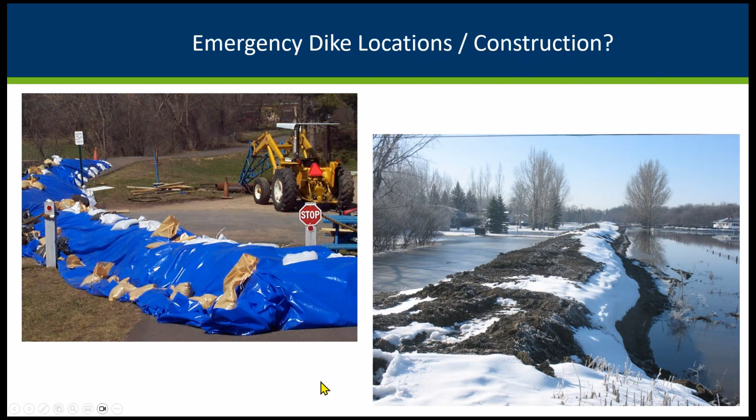But a reminder that when you're looking at where you're going to put those temporary dikes, look at your floodplain map. Remember that your floodway is the area that you're supposed to keep open for the water to go. That's the area where during flooding you expect higher velocities and deeper depths. We do not want to be blocking that. So don't put your levees or sandbags blocking parts of the floodway. We have seen some communities do that in the past.

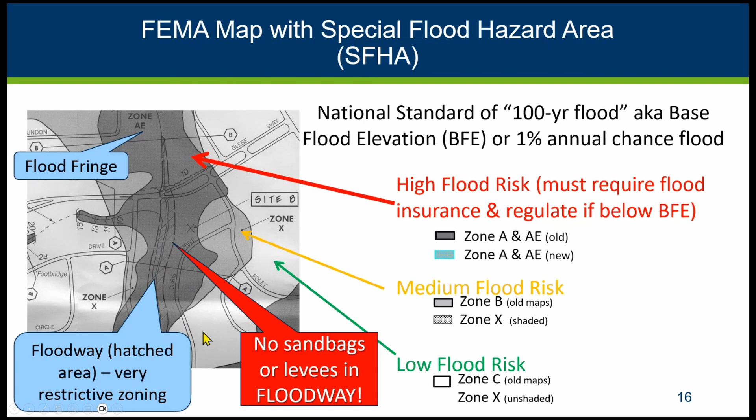So when you're planning where you need the temporary levees or dikes, don't put them in your floodway, because that's going to cause problems. It's going to increase flooding in other parts of town, because you need that area for the flowing water during the floods. Same thing on the newer maps here. Don't put your sandbags or levees in the floodway.

The other thing is to think about where you're placing those temporary berms. Do you have right of entry? Do you have the easements that you need? Are there buildings that have popped up that maybe aren't legal because they're in those easement areas where your levees are supposed to go? Looking at those things ahead of time can be a big help.

The next thing to think about is what critical facilities do you have in your community? Where are the priorities for evacuations? Do you have nursing homes or schools or prisons or hospitals with vulnerable people, where if they're at higher risk, you're looking at where do you move them?

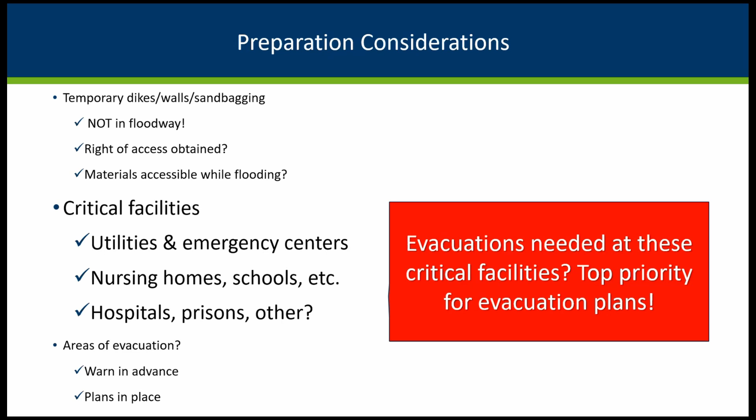Here's an example in Cedar Rapids, which had flooding in 2008. They had facilities on an island in the middle of the river, including their city hall, county courthouse, and county jail. Getting folks out of those areas and having important government facilities flooded was a huge problem for them in 2008.

And it's one where people are basically living there much of the year. So we worked with this community and they were getting elevations at all those spots and identifying areas for them to move to and figuring out what their evacuation plan was going to be. And in general, for campgrounds, we want communities to have their plans. And the flashier the floods are in your area, the more important it is to have a good plan in place.

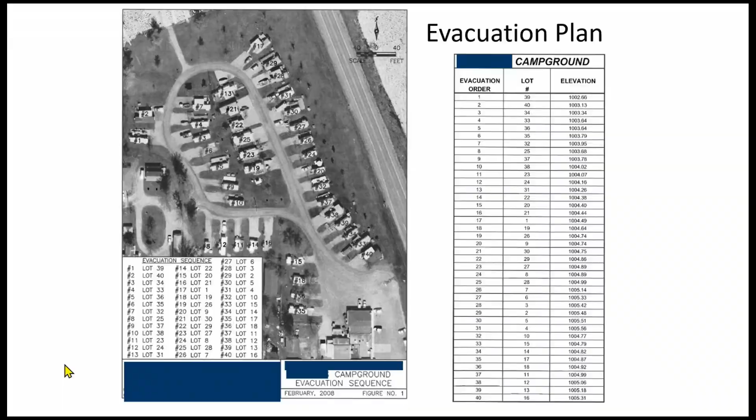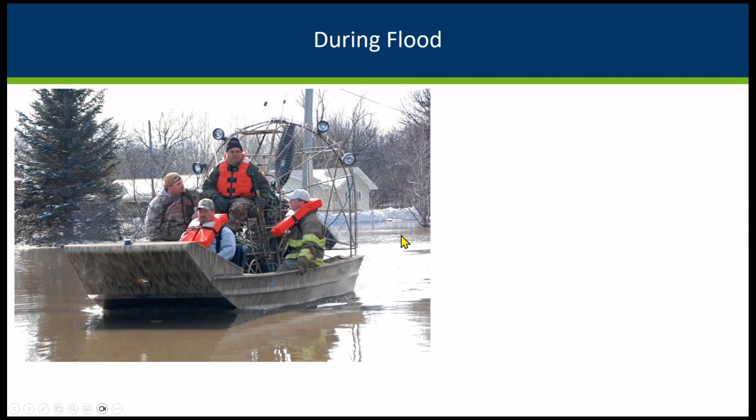Obviously, you want your first responders out there helping people that are most at risk. We've got a few pictures of the folks being rescued. And of course, with the spring flooding, part of the issue that makes it more difficult is it's the spring thaw. We've got snow and ice blocking things. Looking at what parts of the community are flooded. And they're trying to make sure everybody's okay and everybody who's at risk is out of there.

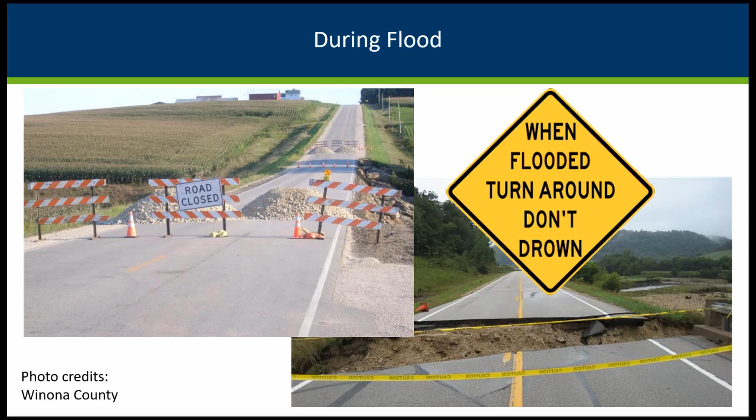But then there's also a reminder of some of the information to get out there, the reminder of turn around, don't drown. And that's something that the National Weather Service has some great resources on, that campaign. So again, turn around, don't drown. If there's some water over the road, don't drive across there.

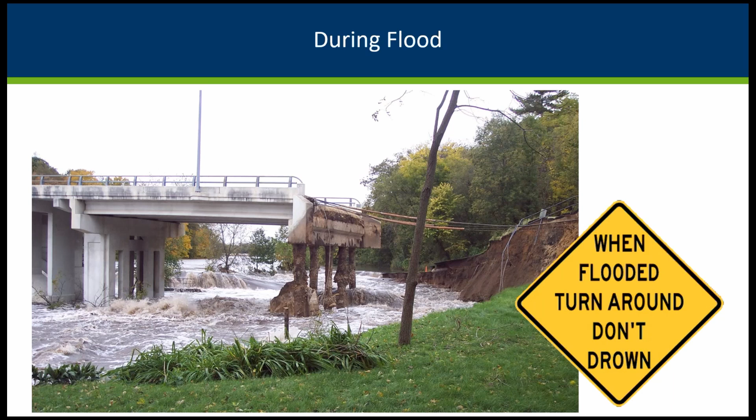Here's an example of what might be under that road. And people don't realize that it could be a huge gap like this, or it could be that smaller erosion that I was showing in the earlier slide. But either way, you don't want people driving across those areas. In Minnesota, and I believe nationally, most of the deaths do occur during flooding due to people trying to cross places that they shouldn't be crossing.

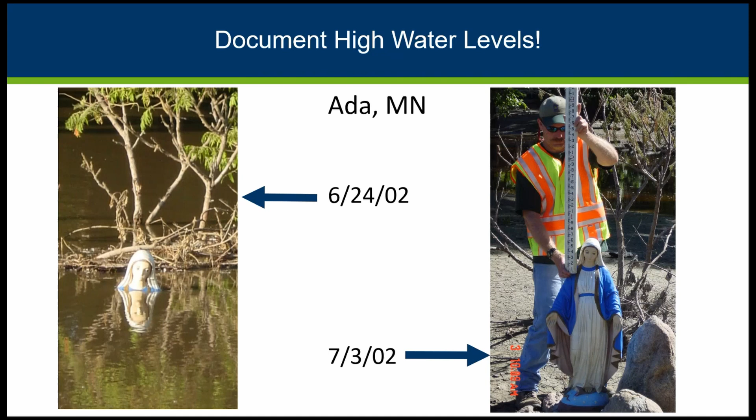So also documenting high water levels. Okay, this one was put together to be kind of humorous. And I was told that the statue is actually kind of floating, so this is probably not a legitimate watermark, but it still kind of gets across the story. But here we've got an example where you could see the watermark. They're getting that while they can and putting in different stakes, showing those high water records while you can still see them before the evidence goes away.

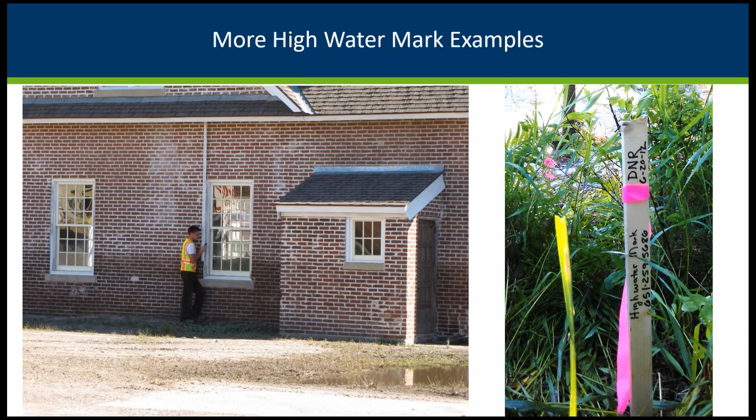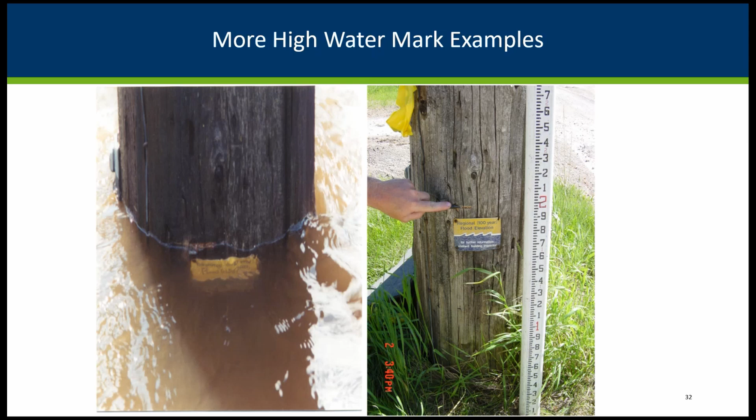And there's a lot of good reasons for knowing how high things got for the given storm for future planning. One more example where they were showing the 100-year. So here you can see it got a little bit above the 100-year. And so they're getting what that actual elevation was. But definitely something communities, once the rescues are done, once it's safe to get out there and be looking at the evidence, you do want to get that at least marked, and then maybe you'll come back later with surveyors, but now we're able to do a lot more surveying out in the field with the GPS and getting better information fairly quickly.

A little thing reminding you that you want to keep track of the staff and volunteer time and how much they're spending, what they're doing in responding to the floods. Because if there is a state or presidential disaster declaration, a lot of that effort can be reimbursed, but you'll need records to show that for getting reimbursement.

And some of the post-flood communications, certainly now, in addition to radio and newspapers and things on your website, we've got a lot more of the social media. And in more recent flooding, that's really where a lot of people are getting their information, is on the social media. Oh, and I got to change that to, it's not Twitter anymore, is it?

During the flood, you're going to be focused on safety messages. A lot of communities and counties do a good job of getting maps up there or notes about, hey, this road's closed here, that road's closed there, or getting some maps up. And even the DOT's 511 site, they've now got little water icons that show areas that are impacted by flooding on the major roads, that they show the status on their website.

After the flood, folks are going to be clamoring for guidance on what to do with their debris. And you'll need to be talking with citizens and getting information out on where to call in and schedule inspections, and reminding them of the need for permits, and a reminder that in floodplain areas they should be getting permits for repairs also. That's something that FEMA made sure is in our model floodplain ordinance.

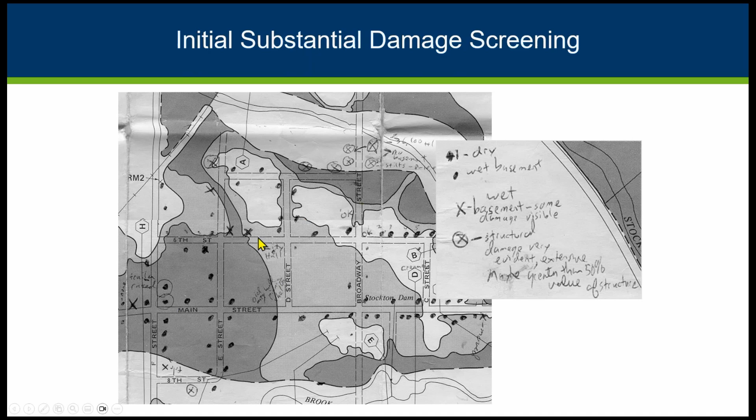But one of the first things you're doing as the water goes down is trying to figure out where you've got buildings that might be damaged or substantially damaged. And sometimes, if you're in a small community, this is an example of a map that was done with the community official and their area hydrologist.

Of course, nowadays, much more can be done with your GIS systems. And this was probably from 2010, so it's getting old here. Now you've got even better systems. But this was showing nicely where they were seeing damage, in this example in Blooming Prairie there. And this was work that Steele County did a really nice job in figuring out where their damage was and where they needed to focus on inspections for potential substantial damage.

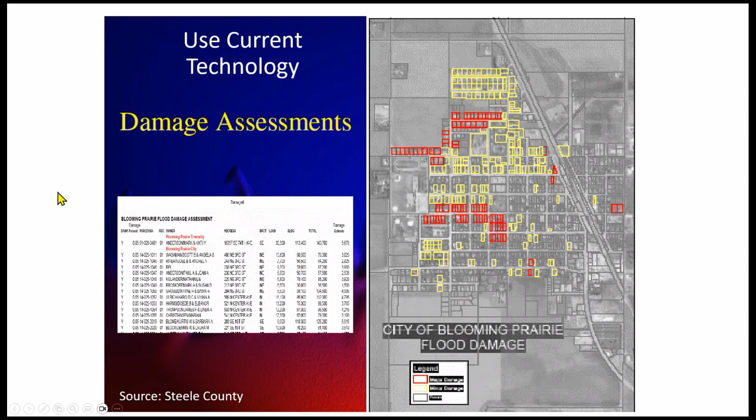In our playbook, our guidebook for response, we get into one of the first things you're looking at, which is whether the buildings with potential damage are in areas regulated by your ordinance. So first you'll be looking at, is it within your community? And then the area where you had the flooding, where are those buildings located? What buildings were in that area? And of those buildings within your community, which ones were in the special flood hazard area that are mapped?

So in this example, there were quite a few that were impacted, but some weren't in your jurisdiction, and this one wasn't in the FEMA mapped area. We might encourage them to build safer and smarter afterwards, but it's this building here, number 4, that's in your jurisdiction, that's in that mapped area, where your ordinance applies, and you need to verify if they're substantially damaged or not.

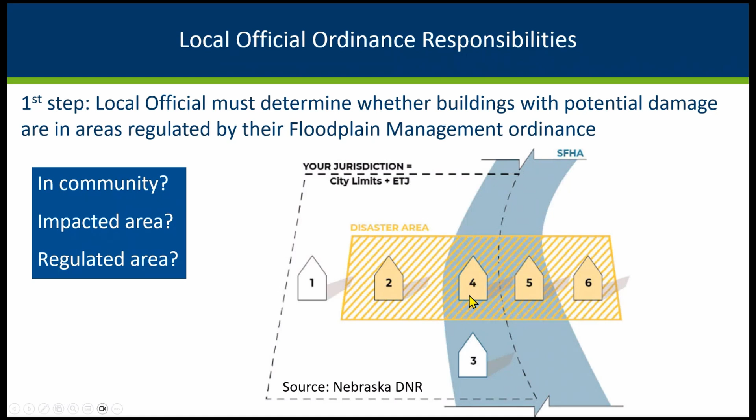We do have this little flow chart that gets into some of the same kinds of things. It's 10 years old now, so it's probably overdue for a bit of a refresh along with some of our other brochures. Hopefully helpful, just kind of broad level, what do you need to be looking at?

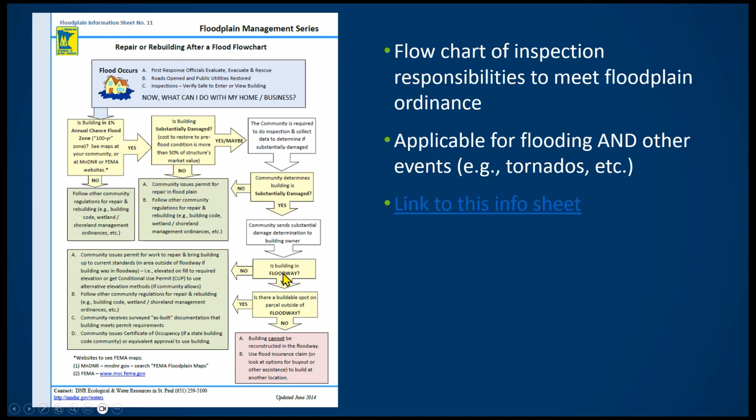Is it in your community? Is it potentially substantially damaged? If it is, what's allowed? And can they rebuild where they are? If they're in a floodway, then they can't. Some high-level guidance for that.

I've already mentioned substantial damage a couple of times. I need to talk about what substantial damage is. And that is in your ordinance. This is coming from federal requirements. These are substantial damage definitions and the requirements related to substantial damage.

But what it really applies to is the older buildings in your community that were built before you had maps, before you had your current ordinances. And those existing nonconformities are allowed to continue to exist. They can do maintenance and repairs. They were not required to immediately come into compliance with your new regulations. But once they've been substantially damaged, they do need to be brought into compliance.

And determining substantial damage, it's going to be based on damage of any origin, so it's not just flooding. In Minnesota, we see a lot of tornadoes. We do see a lot of fires that become issues. The tornadoes are usually getting a bigger swath of your community. Fires tend to be more isolated, and flooding tends to be broader.

And what you're looking at is, what does it cost to repair and bring it back to the pre-damage condition? And you're looking at the cost of doing that restoration, whether they do the actual repairs or not. Sometimes people will say, well, I'm just going to do part of the repair to make it livable in this part of the house, so I'm not over 50% because I'm not doing all that work.

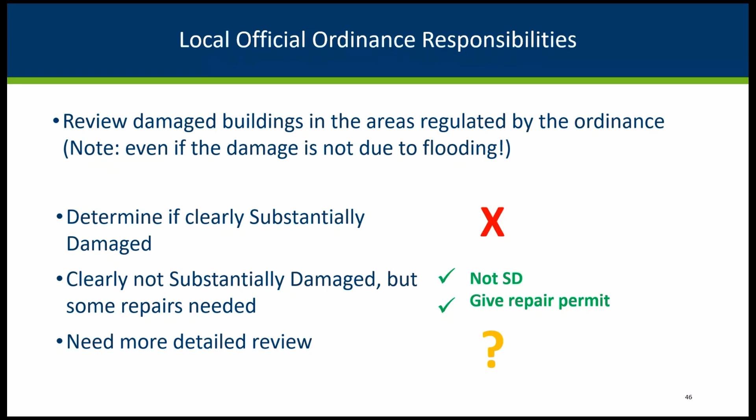There will also be some that you can see that, yeah, they're going to need some repairs, but it's clear they're not substantially damaged. So you'll make that determination they're not substantially damaged. You'll give them a repair permit. And there will be those that it's hard to say. You're going to have to go into more detail to figure out if they're substantially damaged or not. So you'll want to be inspecting all the impacted areas again that are within your floodplain.

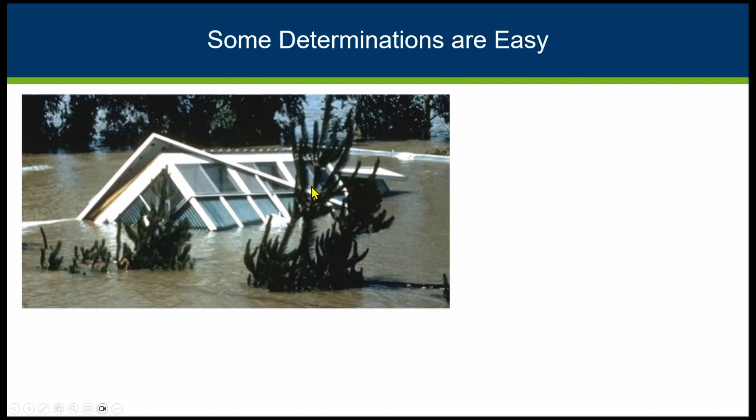And you may not know about some of them at first, but those of you with experience will know that when you start seeing all the debris out there piling up on the curbside, pretty good sign that you've got damage in that building. And as I said, some of the determinations are going to be easy. This is from a FEMA document here showing this building clearly substantially damaged. FEMA does have this bulletin here. It's a few years old now, from 2018, with some nice summary about substantially improved, substantially damaged buildings.

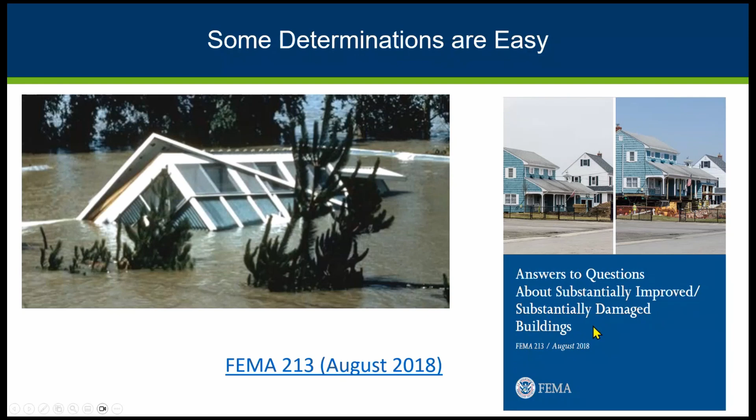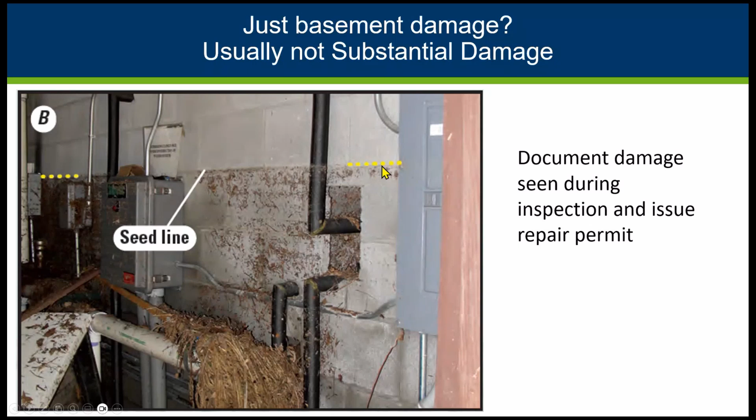And as you're doing those inspections, you want to make sure that you're getting those records, you're taking pictures, making the measurements of how high is this off the floor. Well, this one looks like they've got some possible utility damage too. Typically, if the damage is just in the basement, it's not substantially damaged, but they might have some repairs to do. And you might encourage them to elevate some of those utilities.

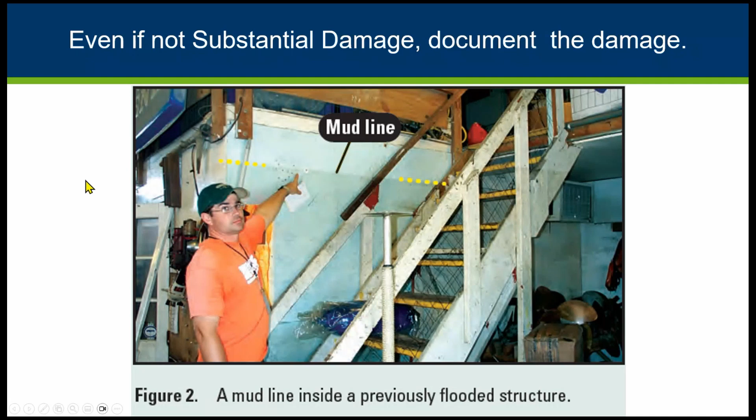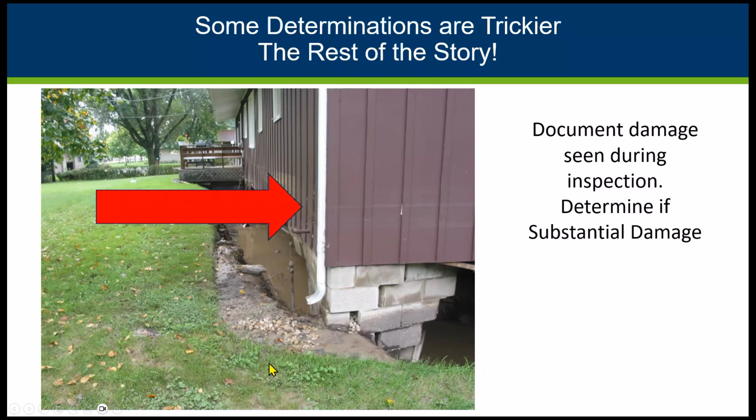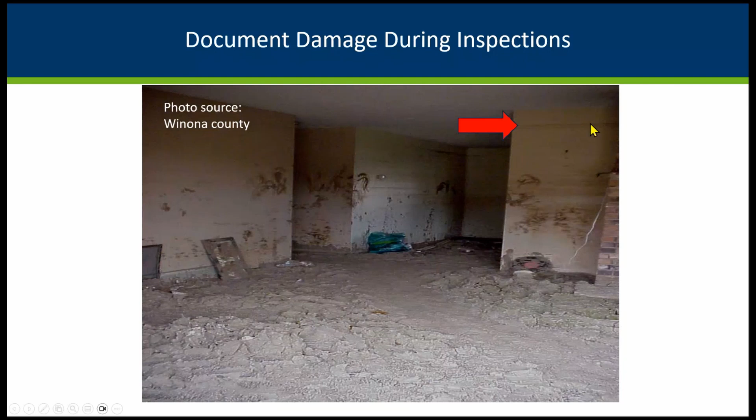Again, Winona had some great photos of the damage that they saw in the 2007 and 2008 era. A mess there, but they were getting the documentation of where the damage was. In our playbook, we do have some depth grids or depth charts here, giving an idea of how much damage you have on different kinds of buildings. Understandably, if you've got a one-story building and the flooding gets up on that main floor, you're more likely to have significant damage than if the flooding is just in the basement, or if it's a masonry building, like that shed that we were showing. It's masonry or it's all metal.

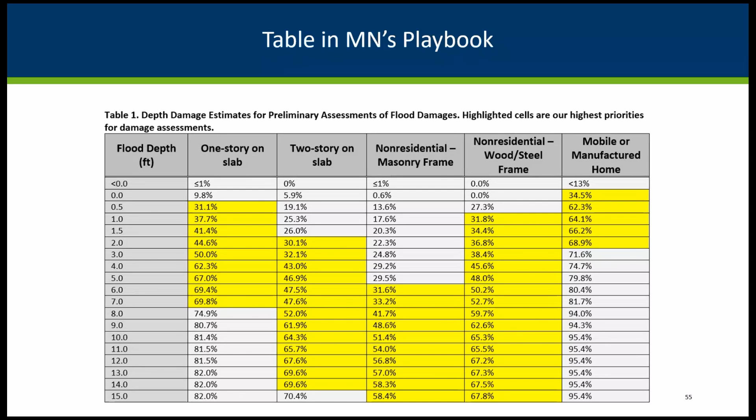You're less likely to have the damage. Mobile homes, basically, if the flooding touches them, they're going to be substantially damaged. Pretty much everyone that I've talked to involved in flood response, every one of them talks about mobile homes, manufactured homes. You get water even on the underside of them, it wicks up and you've got substantial damage.

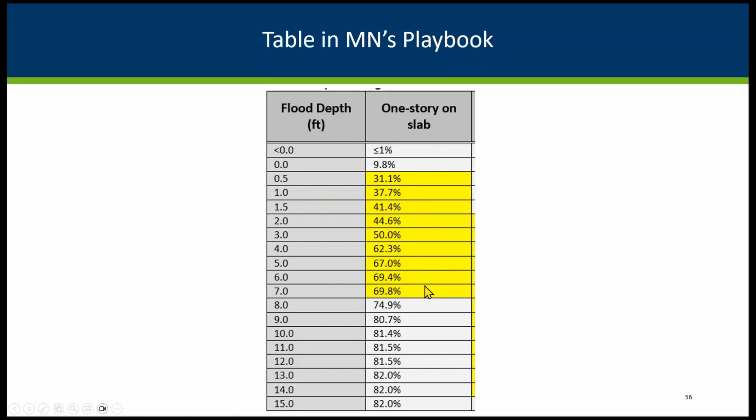And zooming in on one of the examples here, this one-story slab floor building, it doesn't take much water on that building before you're typically getting into that 50% range. So we use this as a guide to help you triage which buildings you need to be looking at more closely. And when they are possibly substantially damaged, you'll want to do a more detailed review.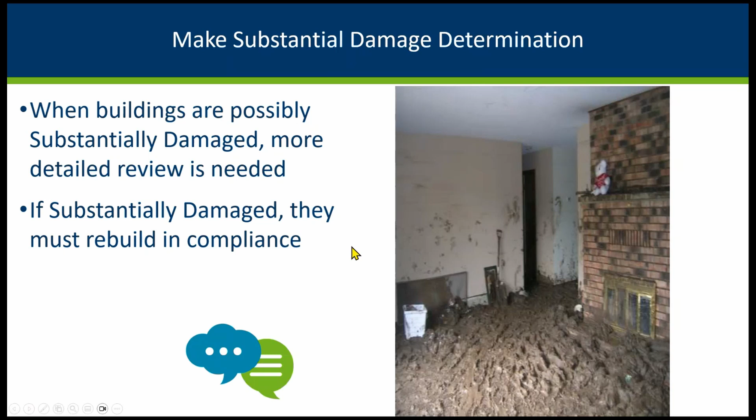It looks like I repeated this slide. Sorry about that. I guess that's why I was just pointing out this was substantial damage we were talking about, but for substantial improvement, we also look at that when people are repairing from floods, sometimes they decide they're going to do other improvements at the same time. And substantial improvement is looking at reconstruction, rehabilitation, additions, or other improvements. We're looking at, is that more than 50% of the structure market value, again, before the start of construction?

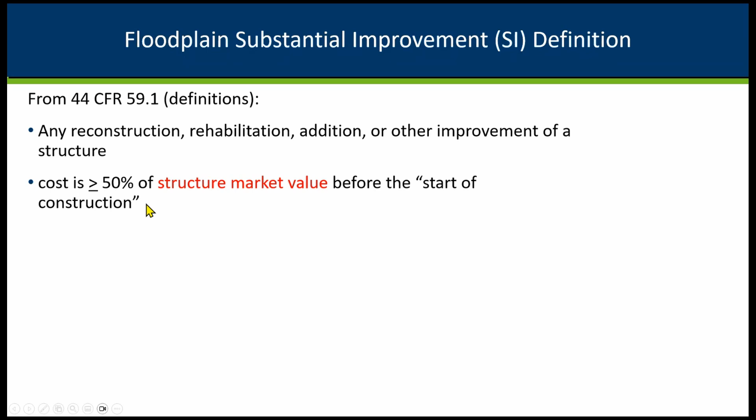And there is wording in the definition of substantial improvement in the regulations that says it's that cost of what you're doing for improvements and repairs and maintenance within basically a year period, the way we've got it written in our sample ordinance. It does specifically say you don't include the cost of repairing previously identified health and safety violations. If some official has red tagged their electric system or their furnace or whatever, you don't include the cost to make that repair. When they start doing their improvements, they can't say, oh, well, this should have been red tagged, and so we're not going to include those costs. It has to have actually been red tagged by a local official in advance of them doing the project.

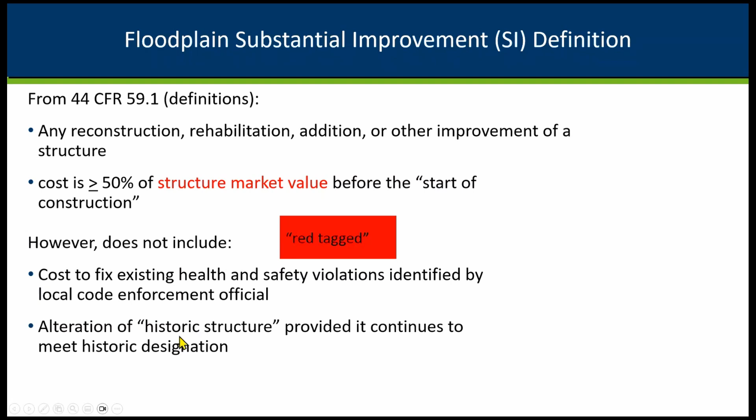The other exception is when you're altering a historic structure, that as long as it's going to continue to meet that historic designation, then a lot of the costs don't get included, and they're not considered substantial. They don't have to meet some of those substantial improvement requirements. And FEMA does have a document that gets into more detail. If you have a historic building, we can help you look through what resources are available, or get some input on how to interpret what things do or don't need to be included in making your determination.

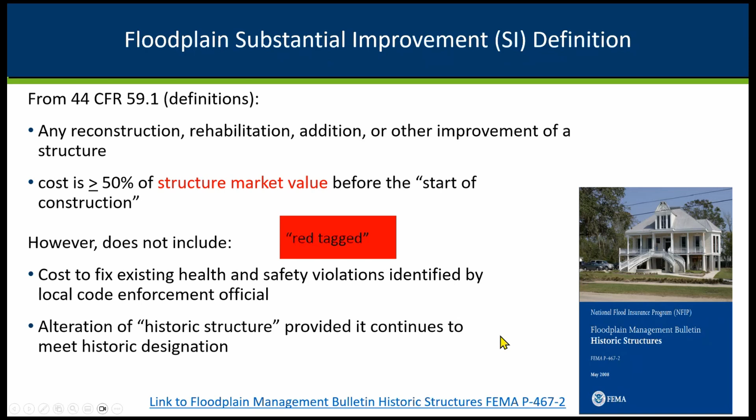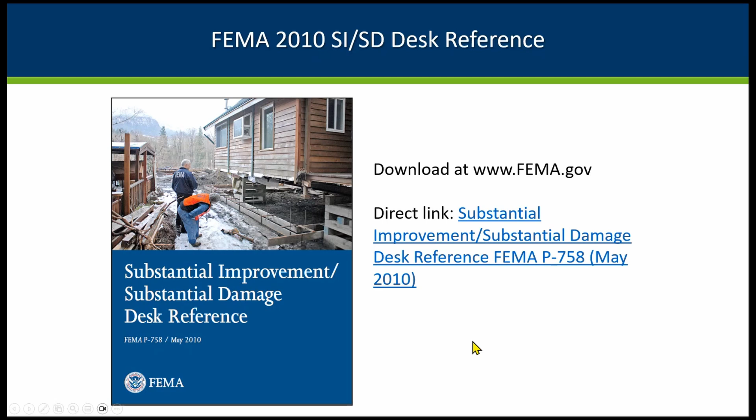The main reference that FEMA has is their desk reference. This is probably a good half-inch thick document. It is available electronically. This is getting older now. I don't know if they're working on an update or not, but it does have a lot of good information in there. And it's got some flow charts to help you figure out what part of the desk reference to look at. And it's got some good information on estimating market value and estimating costs.

And it points out that you've got to be looking at the market value for the structure. Reminder that the regulations say it's the structure only. You're not looking at the land or other accessory structures. You're looking at just that affected structure when you're looking at whether it's 50% or more of that structure. And for many of our properties, the land is really the valuable part, and they might have a small, less expensive structure there. And so they're more likely to be getting into that substantial damage, substantial improvement situation.

We recommend, for sure, you want a consistent method. And the most common way that communities are looking at that is the assessed value for taxes. And the nice thing is that in your assessed values for taxes, they do separate the land value from the building value. So you've got that to work with. And so work with your county assessor.

In some counties, you might know that you need to adjust it by a multiplier. In the state of Minnesota, you're supposed to have your assessed value be fairly close to the actual market value. So they're usually pretty close, but there might be some adjustments that counties know they need to make in your county. Other states, I've heard about how the assessed values are way off from the market value, and they definitely have to make some adjustments.

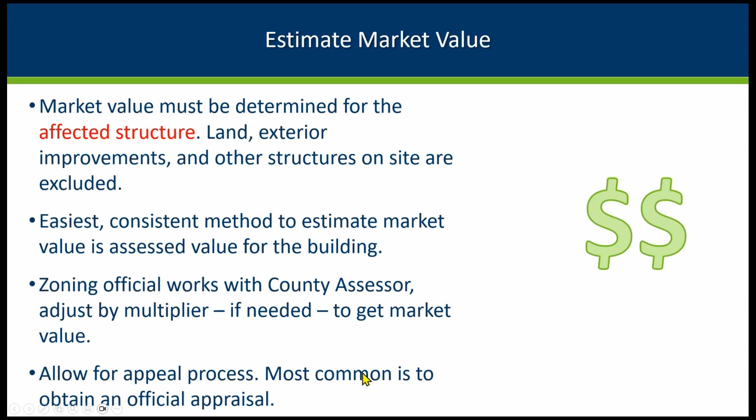The other important thing is that you have an appeal process. The most typical way folks will appeal that is to have an official appraisal done. And that updated, more exact appraisal can be used for determining that market value, for determining whether it's substantially damaged or not. And then if it does show that that building is much more valuable, then you're going to be sharing it with your assessor's office.

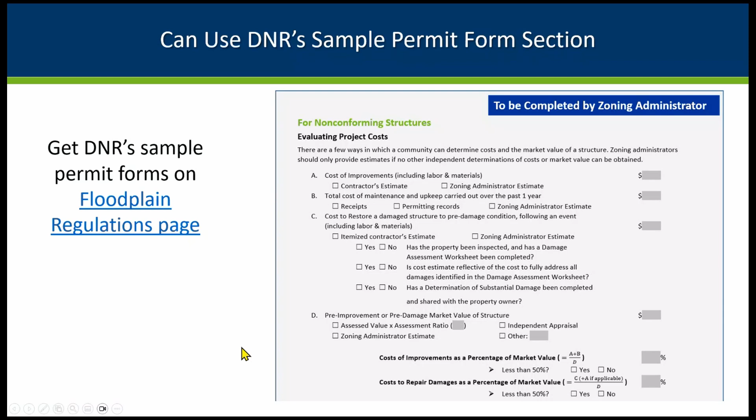In the latest DNR sample permit forms, that includes information for buildings, we do have some triggers and reminders of what to look at for evaluating the project costs for non-conforming structures. So if it's useful for you, use it, great. Otherwise, you might find other example forms more useful. Back to the FEMA guidance, in that desk reference, they do have a page where they get into more detail on what has to be included in those cost determinations.

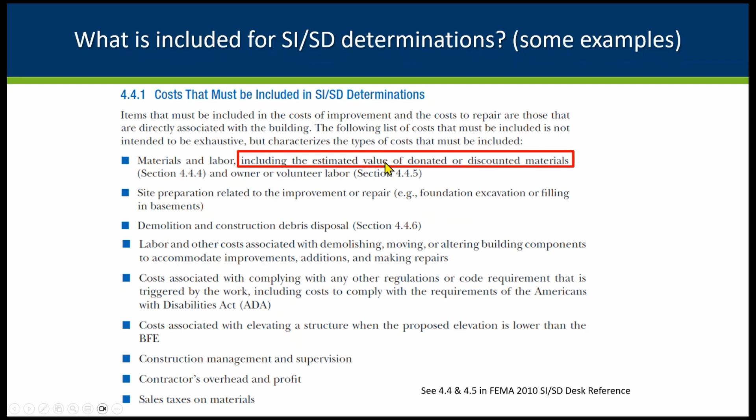You do have to include the value of donated or discounted materials. They can't say, oh, well, the guys at the church just dropped off this stuff and donated it, so it didn't cost me anything. Well, no, you have to look at what it would have cost if you had purchased that material in your community. The other thing is the labor costs of the owner or other volunteer labor.

You should be looking at a contractor's bid of what it would cost to do that project. In fact, here the contractor's overhead and profit should be included in there. So the best thing to be doing is requiring that they're showing some contractors' bids by contractors familiar with what the costs are in that area. Because it does vary by regions of the state, certainly by regions of the country, what it costs to do different kinds of projects.

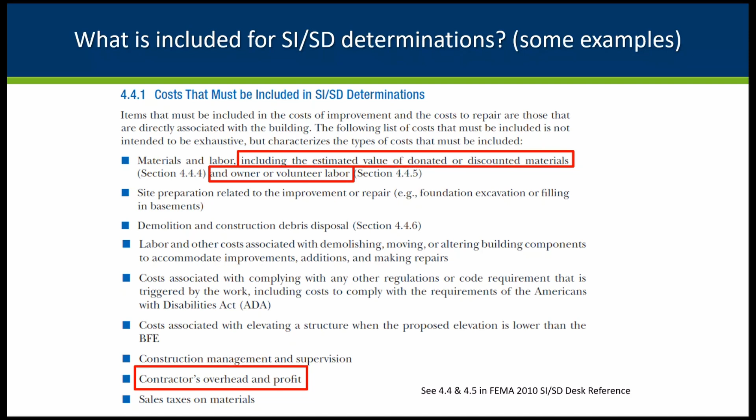Things that you don't have to include would be things like the cleanup, trash removal, permit fees, inspection fees, surveys, outside improvements that aren't part of the building, some of these kinds of things. It gives some nice examples of the things that you don't have to include when you're making that determination.

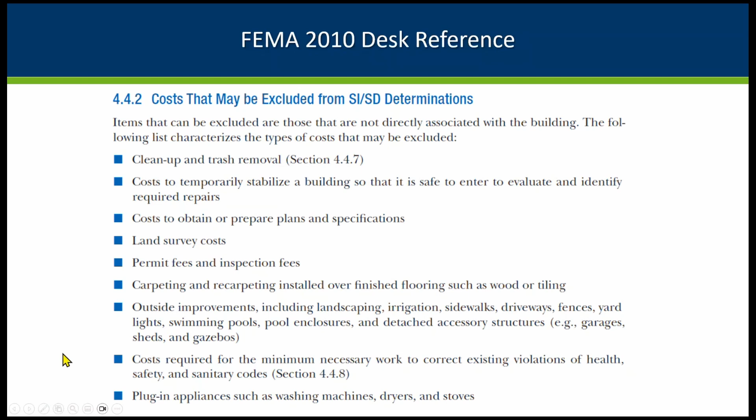And we do have this sample determination letter that you can use in our playbook here. You put it on your city letterhead, a formal letter. You're going to want to have a documentation trail as you're working with folks. They won't be happy about being told that they've got substantially damaged buildings and they need to bring things into compliance.

Oh, and one of the things we note here is that letter, in addition to talking about that they need to bring their building into compliance, if they're, again, within that FEMA mapped area and subject to your ordinance, remind them that if they do have flood insurance, there is the increased cost of compliance. It's basically a rider on their insurance policy if they have the NFIP flood insurance policy. If they're substantially damaged, they can get up to $30,000 to help with that extra cost of elevating, floodproofing, or whatever they might be doing.

A little bit more information on this in these next couple slides: if they do have that flood insurance policy and their damage is flooding, because it's the flood insurance policy, right now ICC pays up to $30,000. That's something that's been discussed at the national level, that they should really be increasing that amount. But at least currently, it's up to $30,000, and can be used for the cost to bring that building into compliance.

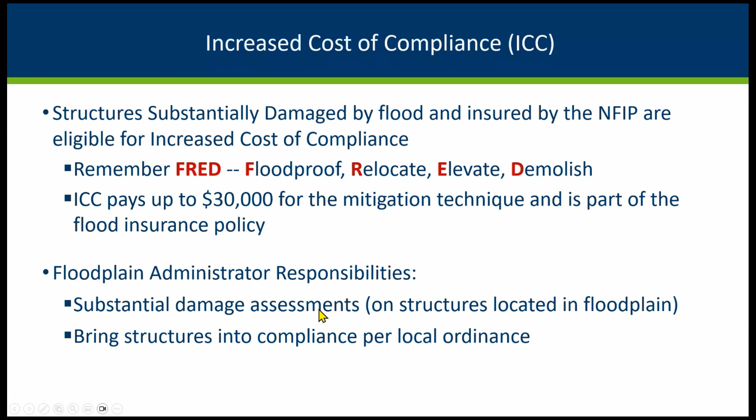But they do need the letter from the community to start that process. So here's an example of a house. This is actually provided by a fellow that we worked with in Rock County, one of the counties in Wisconsin. He's the ICC guru for local officials, a guy named Ray. Ray provided this picture of the building that was flooded and then showing the building being elevated.

And I can see that they're using the internal floodproofing technique that's allowed for residential structures. In Minnesota, it requires a conditional use permit for residential structures. In this example, they did the full level elevation, and I'm sure they're using part of that building as parking. When it's that internally flood-proofed technique, they've got their flood vents, it's flood-resistant materials. They can only use it for parking and storage. It's not a habitable area. But anyway, this is an example of one that I know got ICC money to do this elevation.

So the other thing is, what does trigger the substantial damage and being eligible for ICC, or what are some higher standards? The federal minimum is the 50% damage, that if it's over 50% damage, you've got to require them to rebuild. And that's also when they're eligible to get the ICC. In our state model ordinance, we have had cumulative substantial improvement language in our model for decades, trying to encourage over time getting improvements done and not having people spend a lot of money making improvements and then having it still be at risk for the main part of the building.

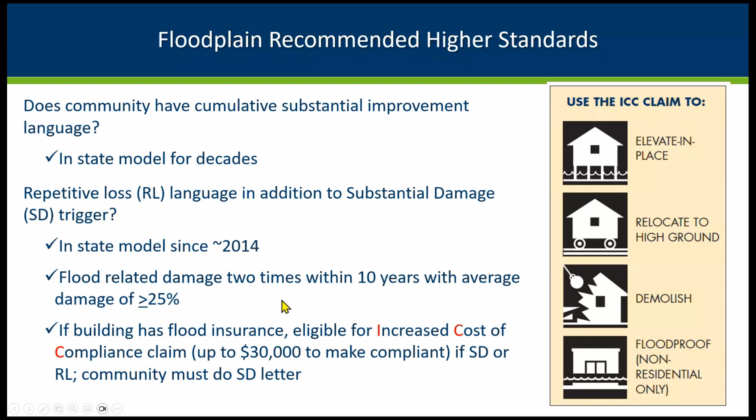And I know we've had a couple counties that actually just added that language recently because they had flooding on the Mississippi. Someone was damaged, like 30%. They weren't able to collect their ICC money, which they had hoped they'd be able to do, because the community didn't have that language in their ordinance. Now they've got it there, so if there is damage in the future, that person would be eligible for that assistance.

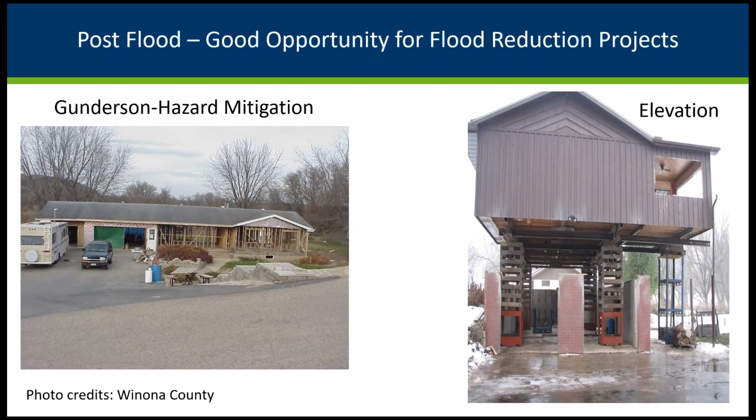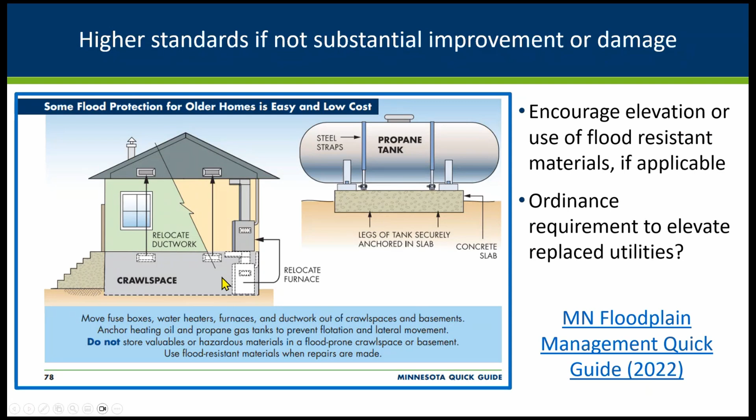So just ending with a few examples of improvements that are useful to make for the future. Here they use some of the money available from different flood reduction projects, encouraging relocating utilities. If it's not a substantial improvement, it's not mandatory, but you can make it a requirement in your ordinance that if utilities are damaged, they relocate them higher. And that's something we certainly would encourage. Oh, I see I'm down to just a couple minutes here.

So a reminder that we do have the DNR's general permit for making repairs post-flood, but sometimes in-kind replacement's not the best alternative. With the public assistance program, there is something where we can get some assistance for better projects that mitigate things better. And that's something we'll talk about more in the presentation we're giving on April 8th on post-flood and the resources available, the public assistance, individual assistance project.

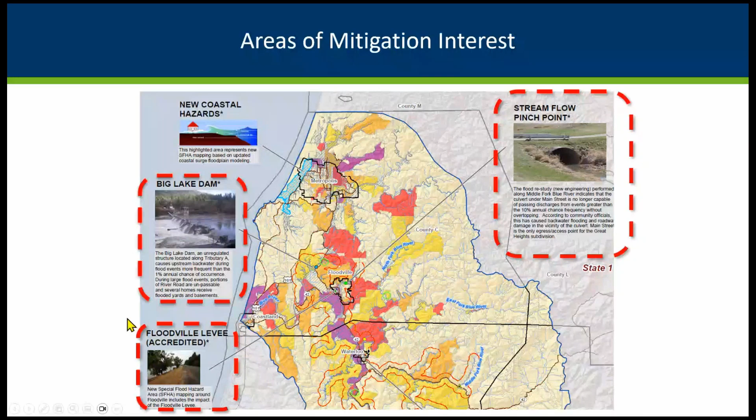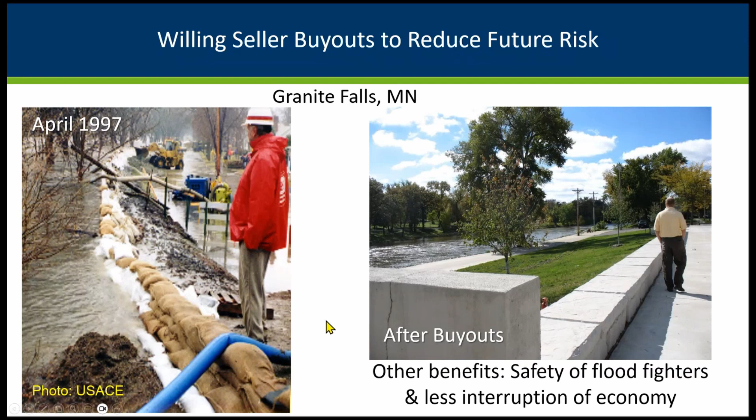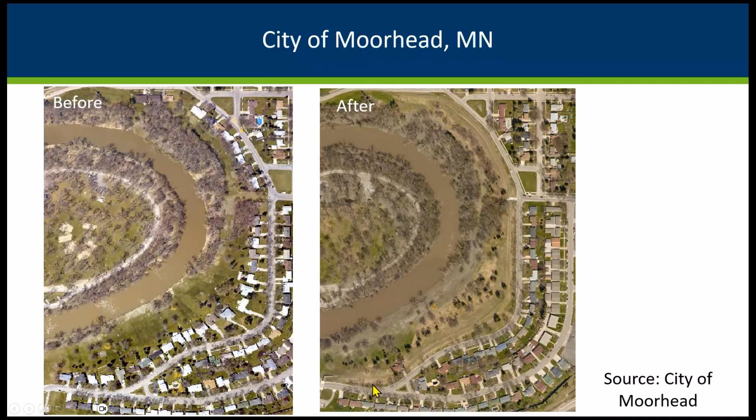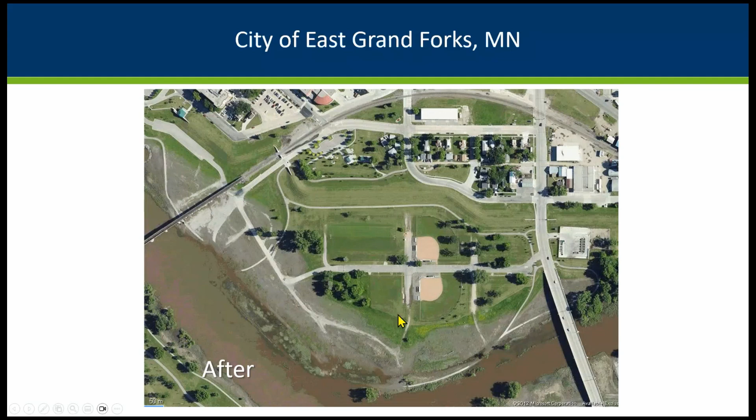Before the flood, they had all these buildings on the riverside, and after the flood, they bought out a lot of these buildings. They put up a little levee to protect those neighborhoods. We've got one holdout here, but they've done a great job reducing risk at the neighborhood level. And East Grand Forks, they pulled their levee back and made this into recreational space. We've got lots of good information on our website. And we'll end right there: during times of flooding, you're responding, you're dealing with those floods, and take advantage of those low water periods to be planning for the future.